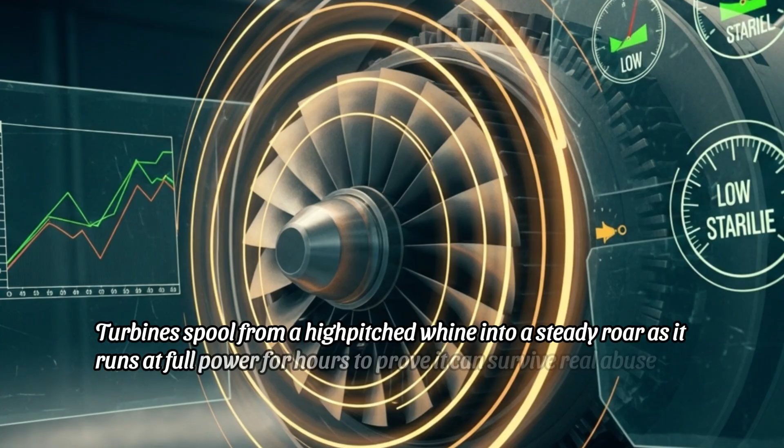At Mirabel, the capability is physical. In one test cell, a prototype engine is bolted down. The door seals, turbines spool from a high-pitched whine into a steady roar as it runs at full power for hours to prove it can survive real abuse.

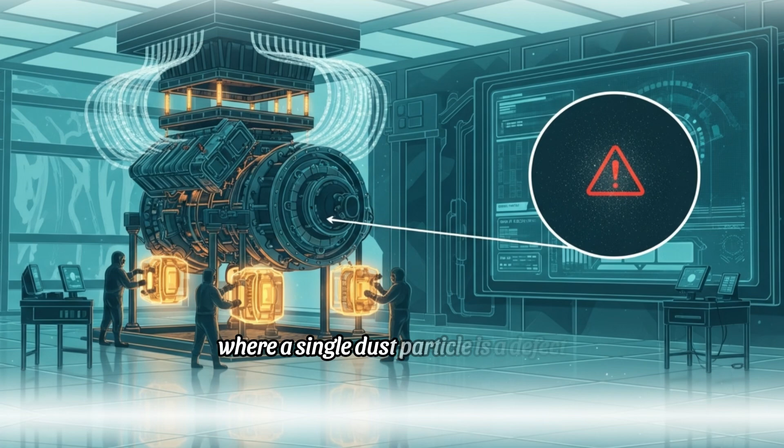Down the corridor, an altitude chamber thins the air to 60,000 feet and drives the temperature through brutal swings to see how hardware behaves in the cold, high sky a fighter has to own. In a nearby clean room, where a single dust particle is a defect, teams assemble sensitive components by hand. Anything missed today becomes a failure in a cockpit years from now.

This strategic architecture wasn't thrown together for one program. It has been built, refined, and paid for over decades. Those same disciplines, endurance runs, high-altitude certification, contamination-controlled assembly, are exactly what a sixth-generation fighter engine needs.

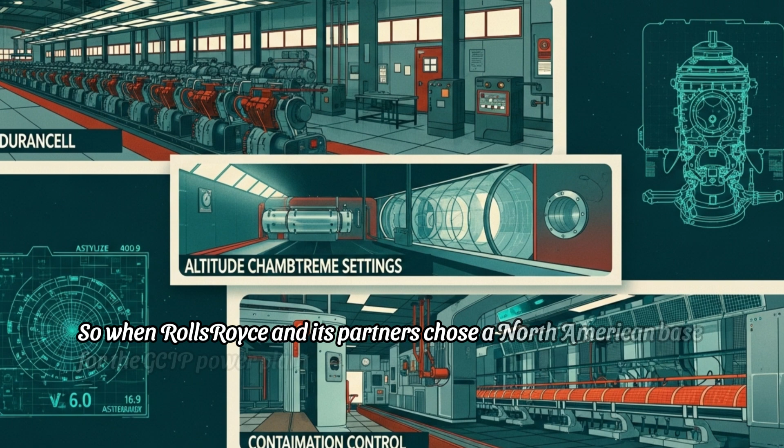So when Rolls-Royce and its partners chose a North American base for the GCAP power plant, they did not have to build this world from scratch. They could plug directly into Montreal and Mirabel. Test cells wired for turbine development, altitude facilities qualified to push hardware to its limits, and a workforce that knows how to read a vibration trace and fix a problem before it becomes a failure.

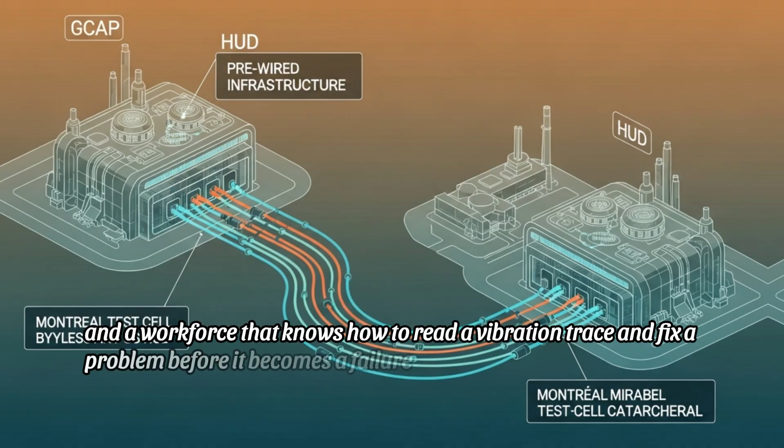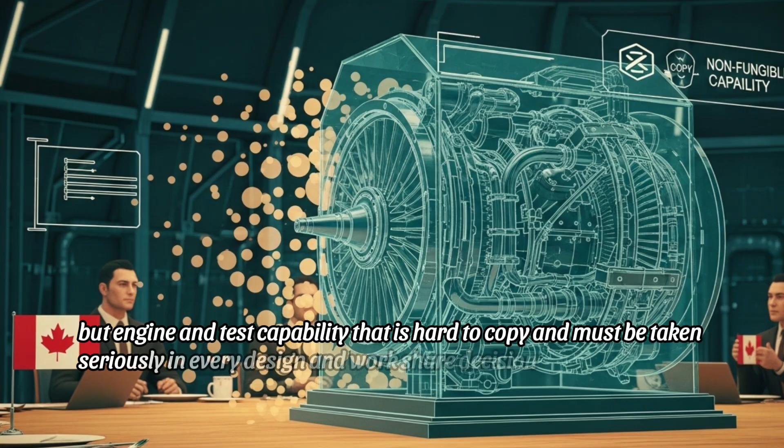Instead of losing years to construction permits, training pipelines, and a brand new supply chain learning on the job, the program can move straight into integration, iterative testing, and production ramp-up on proven ground. Canada had already done the long, quiet, difficult work, and that is what earned it a real seat at the GCAP table. Not a courtesy flag, but engine and test capability that is hard to copy and must be taken seriously in every design and work share decision.

When the core of the engine and the means to prove it live here, Canada stops being just a buyer and becomes a co-author of how future air power is built.

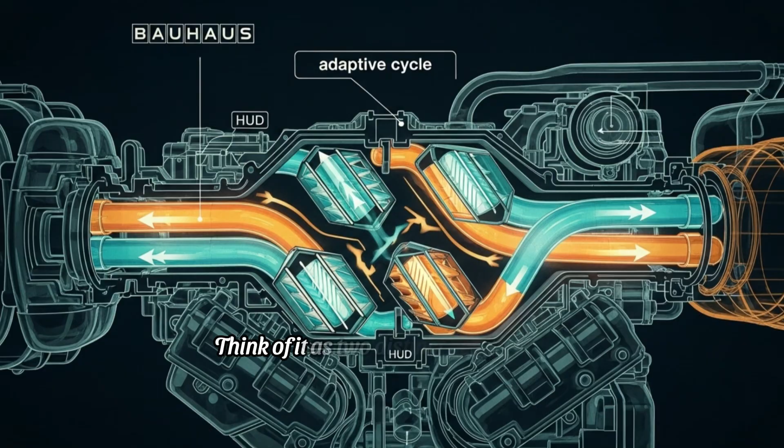That foundation of rugged reliability is now the launch pad for a radical leap, the GCAP engine at the heart of tomorrow's air power. The first departure is in its fundamental architecture. This is the GCAP class engine whose production line is being built in Montreal, based on what engineers call an adaptive cycle. Think of it as two distinct personalities.

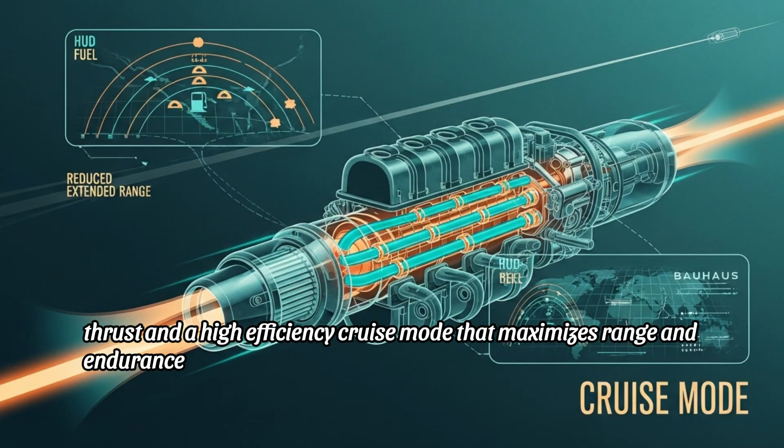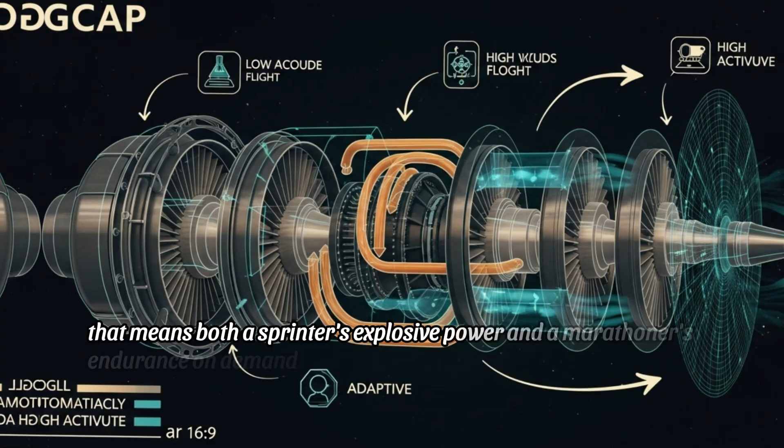A high-performance combat mode that maximizes thrust, and a high-efficiency cruise mode that maximizes range and endurance. This isn't a simple toggle. The engine reconfigures its airflow to match the exact flight condition. For a pilot, that means both a sprinter's explosive power and a marathoner's endurance on demand. For a commander, it means aircraft that fly farther, stay on station longer, and lean less on vulnerable refueling tankers.

A platform like the Saab Gripen, which today flies with a 98 kilonewton F414 engine, could swap in this 150-190 kilonewton class power plant. That change would push it toward nearly double the available thrust at the top end, driving a step change in range and combat performance.

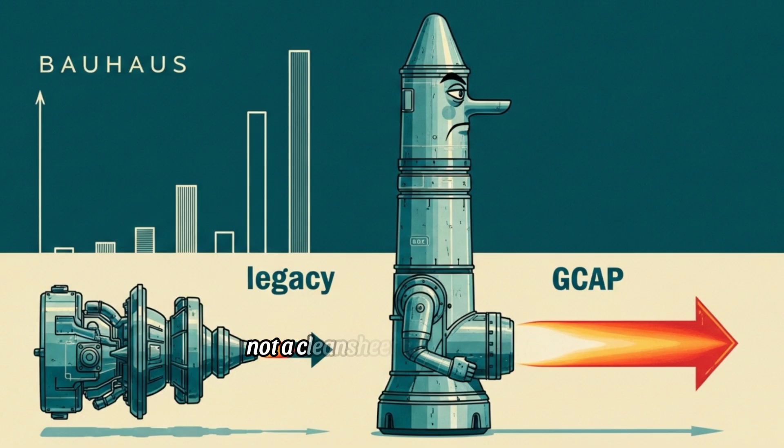And because that's an engine upgrade, not a clean sheet aircraft design, you're looking at a 3 to 5 year path to a generational leap in capability instead of a decade-long replacement program.

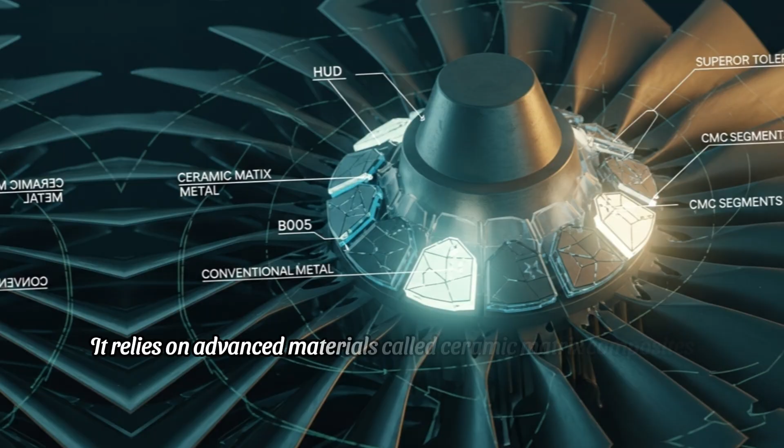The second leap happens inside the engine's hottest sections. It relies on advanced materials called ceramic matrix composites, which let critical parts run at temperatures exceeding 2,000 degrees Celsius, hotter than the melting point of the engine's own superalloy casing.

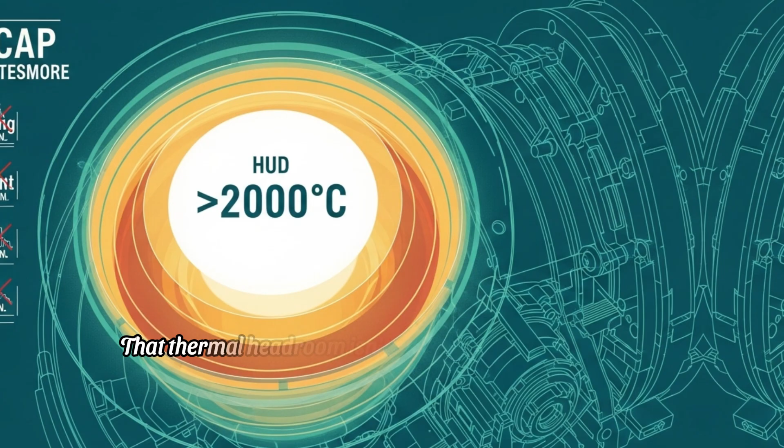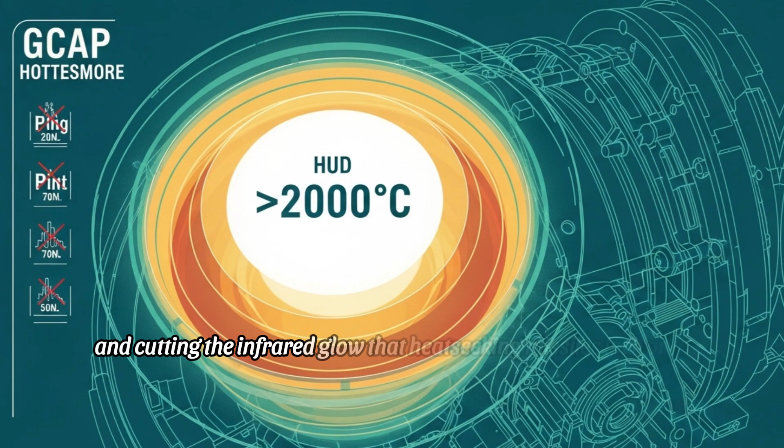That thermal headroom isn't an engineering vanity project. It lets designers squeeze more work out of every kilogram of engine. In practice, it enables a power-to-weight ratio out of reach for conventional metals, feeding more thrust from a lighter core, sustaining higher speeds, and cutting the infrared glow that heat-seeking missiles lock onto.

Taken with the 150-190 kilonewton thrust class and the engine's megawatt scale electrical output, that 2,000 degree figure is one of 3 numbers that mark this as a new category of power plant, not a routine upgrade.

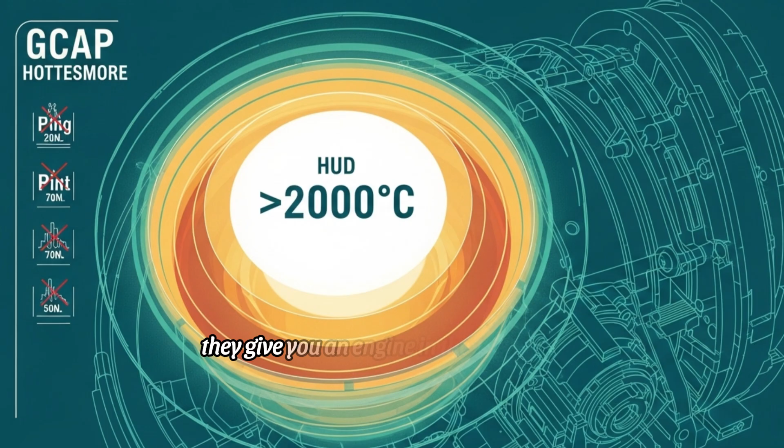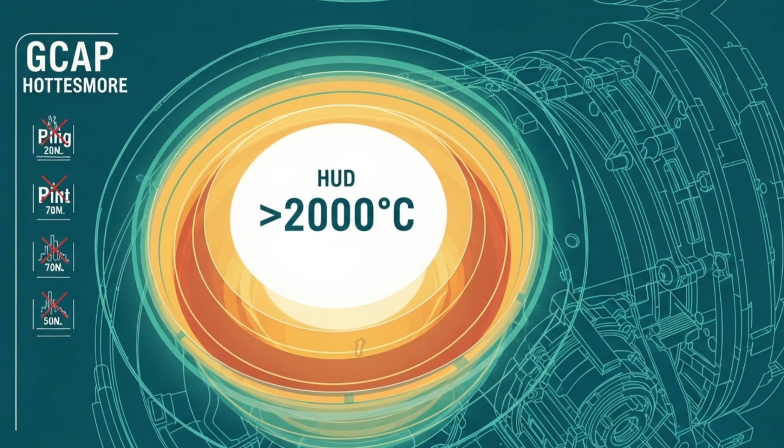These 2 advances, an adaptive cycle and near impossible materials, would already justify calling this a generational shift. Together, they give you an engine in the 150-190 kilonewton thrust class, with core parts running beyond 2,000 degrees, that can still spare megawatt-class electrical power. Pause for a moment. An engine that powerful, that hot, and that electrically capable is revolutionary.

But that stack of numbers is not what has defense planners in Washington, Beijing, and Ottawa circling this program in red ink and quietly updating their wargaming models. The true game changer isn't the thrust or the heat. It's the electricity. This engine is a flying megawatt-class power station.

That's not just enough to run its radar and avionics. It's enough electricity to light up a small neighborhood, all generated by an engine core roughly the size of a car. That power isn't about cockpit comforts.

It's the prerequisite for the next generation of systems, from dense sensor suites and data-hungry battlefield networks to, eventually, directed energy weapons. A fighter without that onboard grid is just a kinetic instrument.

A fighter with it becomes a sovereign node in a wider combat network, an adaptive engine built from near impossible materials that generates its own electrical grid. The engineering is breathtaking, but it would be a mistake to think the technology alone is the story.

The most powerful component isn't the one spinning at 20,000 RPM. It's the fact that this architecture is being designed and industrialized on Canadian soil. The real leverage comes from controlling the design, production, and upgrade path.

Because in this new era, sovereignty isn't just about flying the hardware. It's about owning the architecture. And that architecture brings us to the core of the story, the split between the old F-35 model and the new Montreal model. The difference comes down to one word: control.

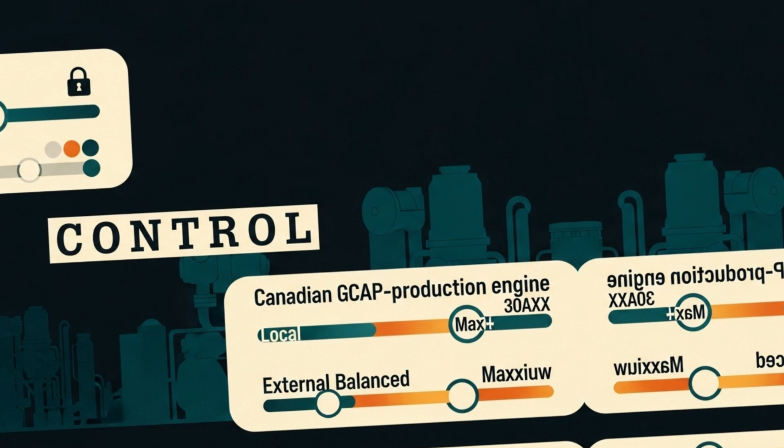That is what I mean by controlled capability. You fly the jet and carry the operating risk, but the software, the spares, and the data highways that keep it alive all run through someone else's hands. You own the airframe, they own the operating system and the supply switch.

What is taking shape in Montreal is built as the opposite of that. The GCAP engine line is being designed around a simple constraint: no American components, and therefore no exposure to U.S. international traffic in arms regulations. The point is not symbolism, it is engineering the legal and technical hooks right out of the system.

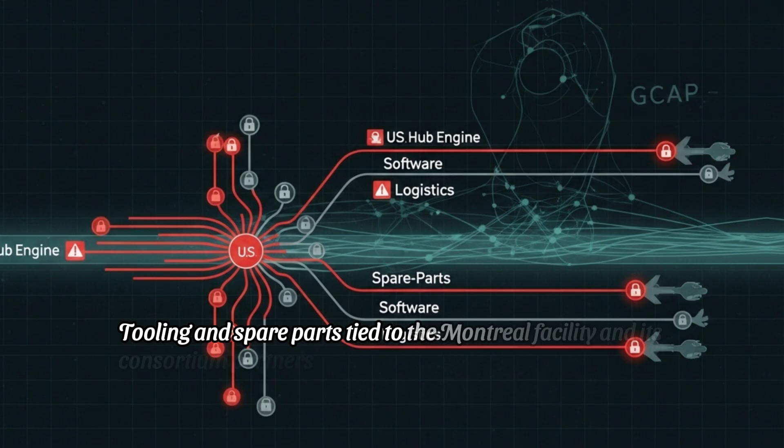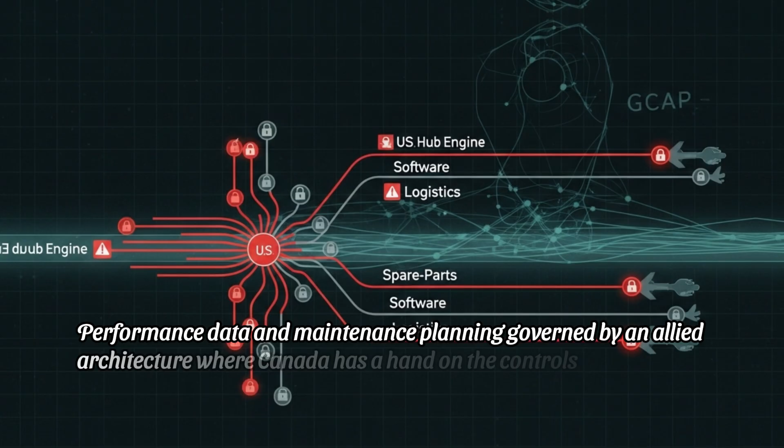Every choke point we just walked through on the F-35 side shows up here as a design requirement to escape. Software decisions made within the partner group, not in a U.S. program office. Tooling and spare parts tied to the Montreal facility and its consortium partners, not pooled under a Pentagon contract. Performance data and maintenance planning governed by an allied architecture where Canada has a hand on the controls instead of being a user at the end of someone else's dashboard.

That is why the Montreal GCAP model is about sovereign capability. In this architecture, Canada does not just host a plant, it holds keys. We help set the production tempo. We own our maintenance pathways.

We choose when and how to roll out upgrades. And the decision to support or deny an export sits with Canada and its partners around the table, not on a desk in Washington stamped ITAR. This is the sovereignty dividend, the strategic return on deciding to own the architecture instead of renting access.

If Ottawa wants to accelerate an upgrade schedule to match a specific threat, it does not have to wait for an American software release window. If a crisis breaks out and Canada decides that a particular ally must keep its aircraft flying, we can redirect engines and parts we control, rather than lining up in a queue for U.S. managed inventory. If a politically sensitive buyer asks for engines, the question becomes: does this fit our interests and those of London and Tokyo? Not, will Washington sign the permission slip?

Those choices compound over years. Independent upgrade cycles, ITAR-free export decisions, and crisis-time autonomy reshape how other states read your guarantees and your red lines. You are no longer just operating platforms designed elsewhere. You are a co-author of the industrial base that underwrites your foreign policy.

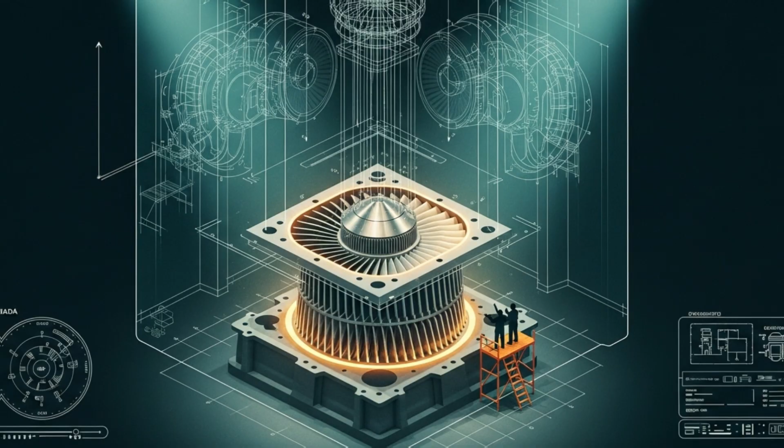It's like examining a single perfectly machined cornerstone without seeing the plans for the entire cathedral. Because this licensed production isn't the endpoint. It's the calculated first step in a far larger, more ambitious industrial strategy designed to reclaim something we haven't had for decades. That skepticism is valid, but it focuses on a single data point while ignoring the trajectory.

This licensed production isn't the final destination. It is the precisely engineered cornerstone of a national industrial strategy aimed at reclaiming something we haven't possessed for decades: real design authority over critical systems. The strategy built around that cornerstone is methodical. It is not a sudden leap, but a calculated, phased transfer of capability.

It starts with Canadian facilities producing roughly 10 to 20% of the engine components. As that share grows, we layer in more complex processes and move up the value chain, step by step, until we reach full engine assembly and testing in Montreal. Only then do we scale toward a production rhythm of 50 to 100 complete units per year. On paper, that sounds like manufacturing.

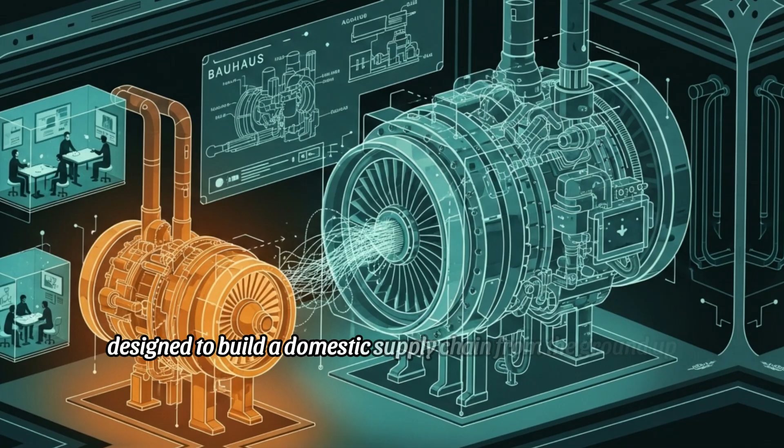In practice, it's a deliberate apprenticeship in advanced aerospace architecture, designed to build a domestic supply chain from the ground up. This is how a nation builds real leverage. It directly addresses that quiet, persistent frustration: why, with all our talent, are we still dependent?

By turning it into concrete milestones: a rising share of engine work done here, and a growing slice of overall defense contracts flowing through Canadian firms. Because leverage isn't found in simply assembling someone else's design. It's built by becoming the ecosystem that can innovate around that design, export its own components, and eventually design the next generation itself.

That shift is what turns defense spending from a recurring national cost into a genuine economic multiplier. Prime Minister Mark Carney's defense industrial strategy is essentially a spreadsheet of that multiplier effect.

It rewires procurement so that capability building at home is a core deliverable, not an afterthought, by pushing the domestic share of defense work from roughly 30% today towards 70%. It keeps far more of each procurement dollar circulating through Canadian wages, supplier contracts, and tax revenues instead of leaking abroad. And by targeting a 50% increase in defense exports, it turns the same engine program from a pure cost into a revenue stream as allied air forces buy technology that comes off Canadian lines.

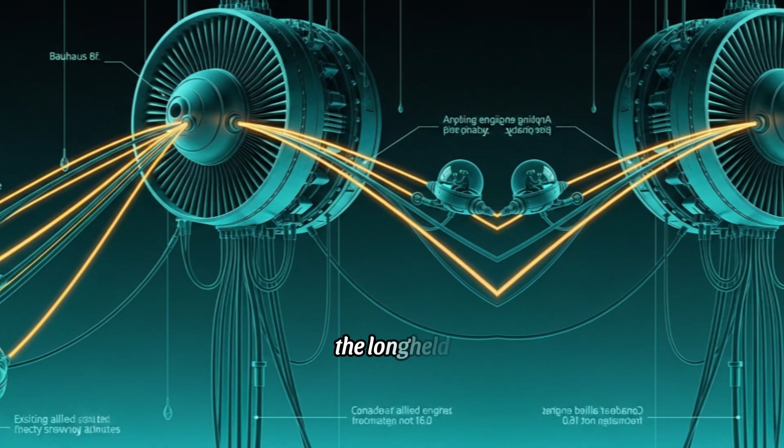The answer to that opening question, what happens when a country can build the heart of a fighter jet on its own terms, is now clear. By putting a next-generation engine line on Canadian soil, the long-held U.S.-centered monopoly on advanced propulsion isn't being politely challenged, it's being bypassed. And with that bypass, the architecture of power around these engines shifts.

Imagine a map. For decades, the flow of this critical technology has been a series of one-way arrows, all starting in the United States and radiating out to allies. A centralized hub-and-spoke model, controlled, predictable. Now watch that map redraw itself in real time. The U.S. hub is still there, but it's no longer alone.

Fresh lines are etched onto the board. A link forms between the UK and Japan. Another connects Italy to Canada. The Montreal plant isn't just another industrial address. It's a sovereign node in that network, where Canada controls production runs, anchors high-end propulsion expertise at home, and hardens its supply chain against someone else's export politics.

As one analyst put it, the long-term monopoly is fading, new pathways are forming, and the possibilities for what modern defense manufacturing can be are being redefined. For Canada, this doesn't just change a graphic, it changes leverage.

Ottawa has moved from simply buying finished engines to tying access to a top-tier program, to co-production, tech transfer, and a permanent industrial base in Montreal. That combination is what makes Canada's strategy a real operational blueprint for other middle powers.